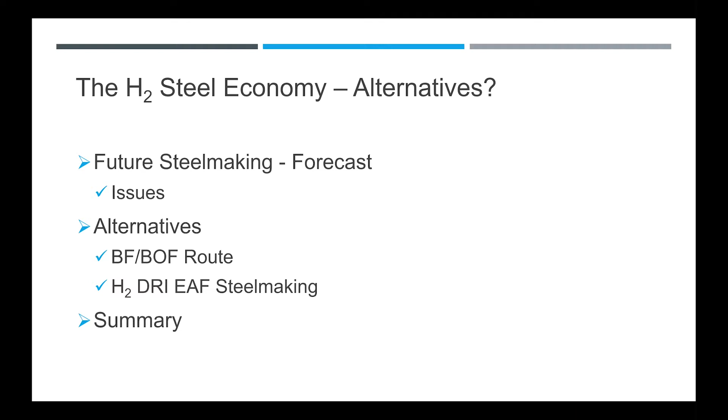I'm going to basically look at the hydrogen economy and the thought process of hydrogen DRI and the EAF, looking at the future forecast and issues I believe are evident in the potential of using the DRI. Look at alternatives that we might explore further in terms of the blast furnace BOF and also the DRI and the EAF before I summarize. Next, please.

We all know that it's the preferred CO2 mitigation process for the future, hopefully attaining something like 0.02 tons of CO2 per ton of steel. In 2019, we had almost 28% of the world's steel from EAFs, and we're predicting moving forward to probably closer to 74. And of that, 50% will be from scrap and 50% from ore. And of the iron produced in 2070, 0.575 tons of the iron is going to be from DRI, whether it's hydrogen or natural gas based. Next, please.

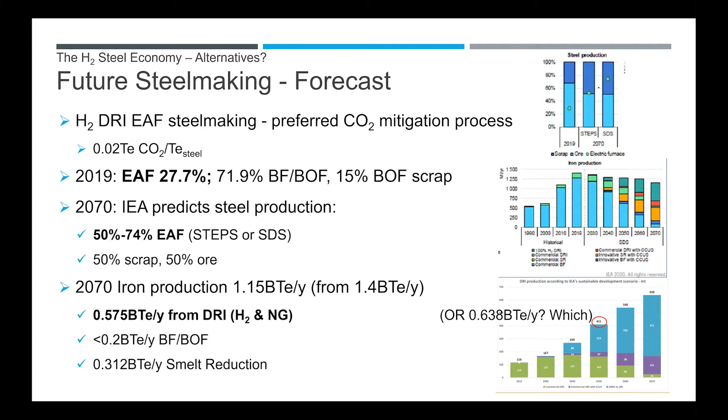Next, sorry. I've done a quick calculation. One of the biggest issues I believe is going to be construction rates. The DRI plants have gone from 0 to 104 million tons a year in 50 years, which is approximately a 2 million ton plant a year. And if you look at 2050 and 2070, you're looking at 14 or 13 DRI plants a year.

The terawatts for that are about 8.4 and 173 when you move to 2070. And that constitutes 3,898 20 megawatt PEMs, which are pretty standard at the moment, and 8,656 when you get to 2070. In terms of the EAFs, you're looking at 551 new 2 million ton a year EAFs, or 700 when you get to 2070.

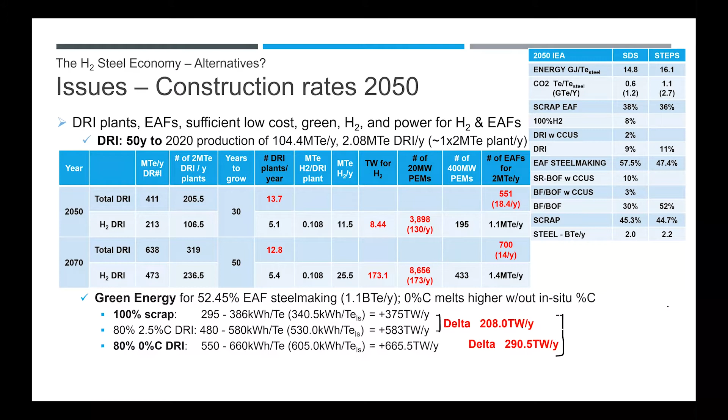And then if we look at the green energy, this was a quick calculation and it's a bit on the low side in terms of kilowatt hours per ton of liquid steel. But basically, if you're going to use 80% zero carbon DRI in the arc furnace, you're going to look for an additional 290 terawatts. Next, please.

The next issue is cost of steel. Not only do we have the cost of new mills and infrastructure, but the zero carbon DRI is going to make steel cost $1,327 a ton of liquid steel if you use the IEA numbers. And this is at 2030, not even 2050. CRU, on the other hand, say that it's going to be $3,700 per ton of crude steel. And they're looking at $200 to $300 per ton of carbon tax, which would incentivize 60 to 90% of the steel makers in Europe, respectively.

ArcelorMittal has stated that their cost of production is going to go up 50 to 80% if they use hydrogen DRI. And the other issue is going to be the worldwide competitiveness against people that are not going to comply. And we've already got a problem, as you can see from this chart, of the USA being more expensive even than the Europeans, never mind the Chinese. Destruction of the current BOF blast furnace infrastructure and downsizing of manpower is going to cause social implications. And of course, there are some major challenges for zero carbon DRI in the arc furnace.

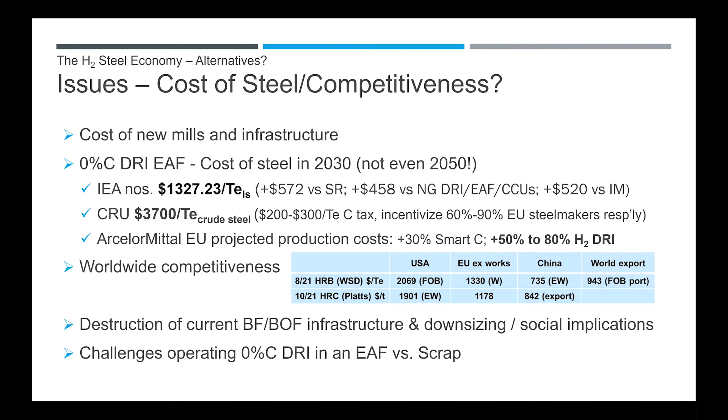Next, please. What are they? Basically, they're going to reduce chemical energy, which is now 30 to 50%. We need to find some possible replacements. You're going to have slower bath reactions. You're going to have lack of foamy slag, which has its own issues, reduced productivity, yield, heat transfer in the bath. And you're going to need more carbon in, whether it's injected or we have an efficient OBM situation or base metallics, or we can use tire wastes or other materials, but it's going to require more oxygen, which is more CO2 and more power.

More power is going to cost us between 0.3 and 1 kilograms of CO2 per kilowatt, depending on the source, hopefully green, but in the US, it's going to be an issue getting green power. Increased gangue will come from not only the DRI, but also the FeO going to the slag, and that's going to create more slag because of lime needs.

And the other issues which would create more kilowatts and lower yield are going to be, you need a higher temperature to melt if you have less carbon. You're going to have to rethink the refractories because there's going to be carbon dissolution and erosion from the slag FeO. You're going to need a deeper bath because without the foamy slag, you're going to need a greater volume, and that's going to require bath stirring, and most of the steelmakers have been fighting using that for a long time. And again, we have degradation of the ore, which will compound the gangue issue.

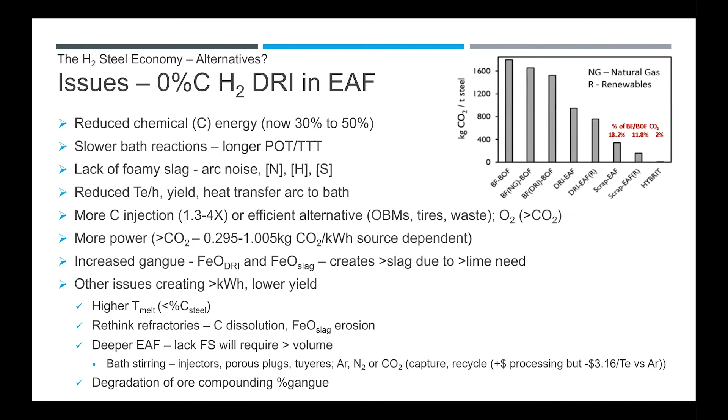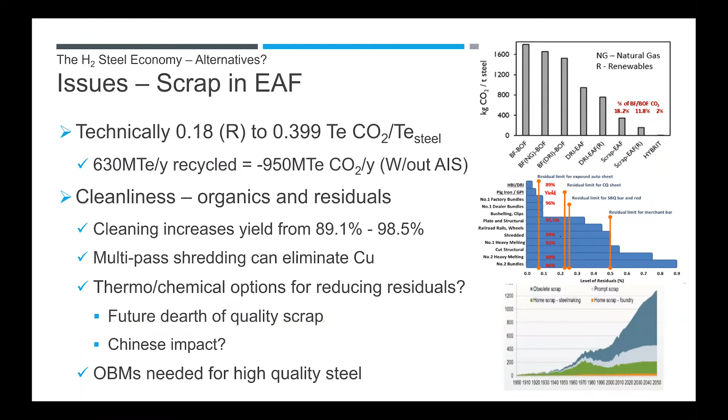Scrap in the EAF, there are some issues there. Obviously, one of the biggest problems is cleanliness in terms of organics and residuals. We've seen some reports saying that cleaning will increase yield up to 98.5%. Multi-passing through a shredder will eliminate copper. And the question becomes, are there thermochemical options out there to reduce residuals further? There's going to be a dearth of quality scrap in the future, and we need to look at how we can utilize that. And we've also got a big issue with the volume of scrap that will be coming out of China soon. So currently OBMs are required to a large extent for high quality steel.

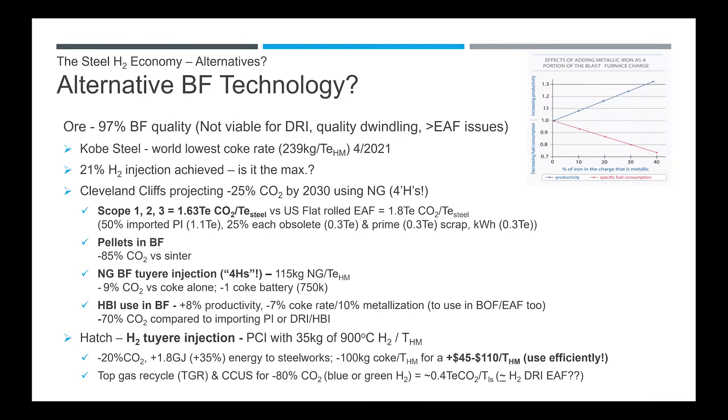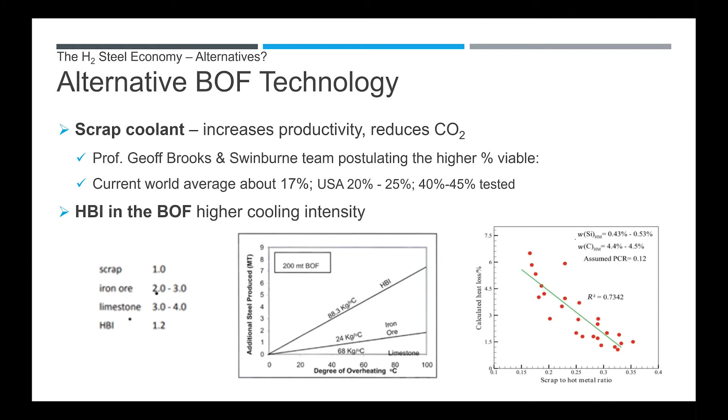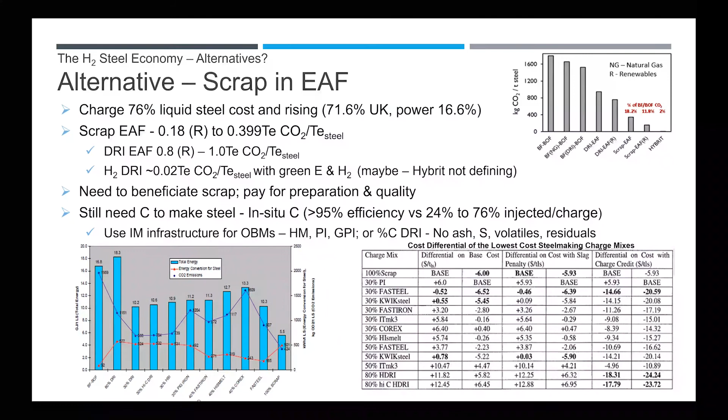In situ carbon is much more efficient in terms of reactions and performance. So we need to find some mechanism to import some good efficient carbon to the furnaces, and possibly continue to use the DRI, the hot metal pig iron and granulated pig iron, and save the infrastructure of the OBMs. And of course, DRI is an option, but preferably with carbon, because it has no sulfur, no ash, no volatiles, and no residuals. Next, please.

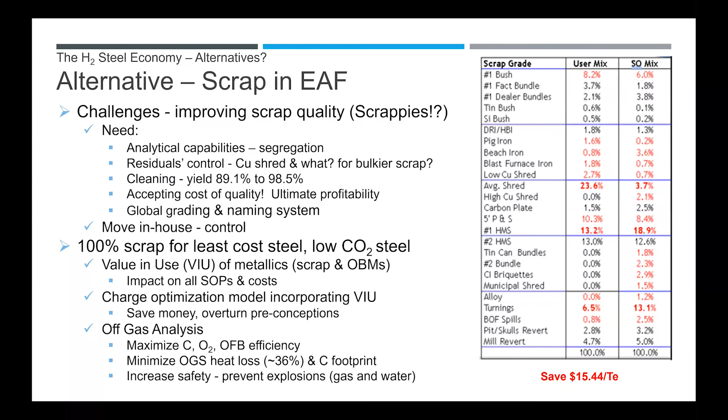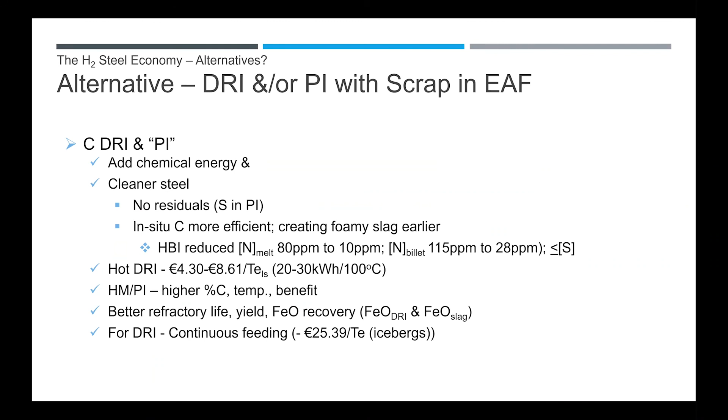So in summary, hydrogen DRI EAF steelmaking is going to be costly, and it has some major techno-economic challenges, which I don't believe are truly being addressed at the moment. It's going to compromise competitiveness. It's going to be very dependent on the ability to supply cost-effective green energy and hydrogen at the capacities that are required. And we need to find alternative chemical energy and foamy slag sources.

The alternatives, of course, are to upgrade scrap, maximize the use of scrap in not only the electric arc furnaces, but also in BOFs, I believe. We should look at in-house scrap management; I think most of the big US steelmakers now have their own in-house scrap dealers. But we also need to look at developing CO2 mitigating alternatives for the integrated mills so we can minimize their carbon footprint. And again, look at new technologies, but I'm not sure we have the time to do that.

There is a project ongoing right now to look at biogenic carbon containing DRI and incorporating that with CCUS, which will give us zero carbon footprint technically. New steelmaking processes, I don't know whether that's viable. We've been looking at new processes for the last 35, 40 years, and we really don't have any that are at full capacity.